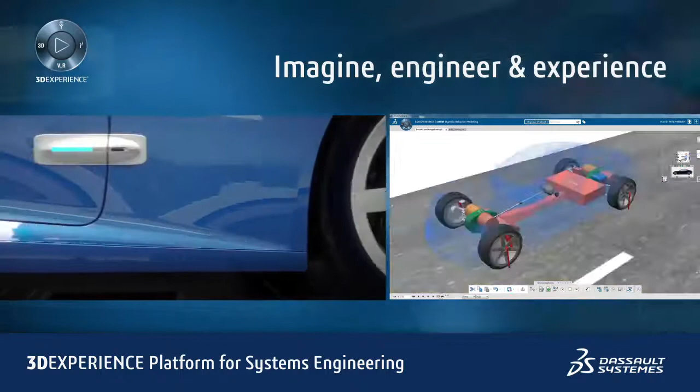The platform delivers an integrated model-based systems engineering environment to imagine, engineer, and experience high-fidelity digital replicas that accurately predict a product or system's behavior through 3D experience, just like in real life. But why do we want to put 3D experience at the heart of the systems development process? Because 80% of today's vehicle innovations come from embedded systems.

These systems account for 20 to 40% of vehicle development costs, and they are delivered as 7,000 technical and customer orderable functions that are defined by more than 300,000 requirements. The massive number of possible vehicle configurations makes it impossible to fully analyze the interaction of any one system with other systems within a real vehicle.

For more than 60% of the development time, no real prototypes exist. And even when they do exist, they are costly to produce, often incorrectly defined, and are utilized in a suboptimal way. Less than 10% of systems engineers get validation time with these prototypes, resulting in the late discovery of system errors that should have been identified at the concept design stage.

Typical automotive manufacturers and their Tier 1 suppliers use hundreds of disconnected systems engineering tools to implement these functions and systems. And in doing so, they create many thousands of models of the systems being developed, with each tool having its own view or model of the system.

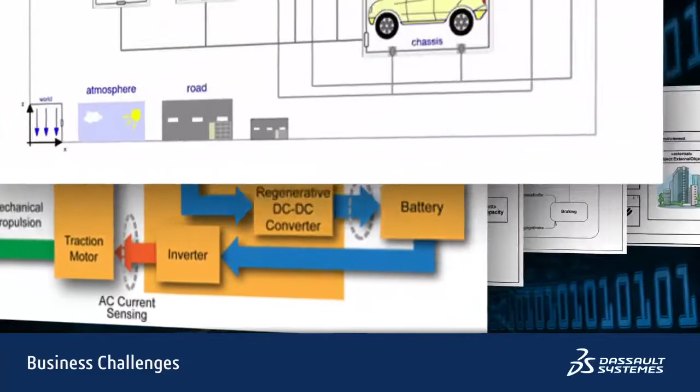But these individual models are largely disconnected from each other, as they are authored and managed by different legacy and proprietary tools. This limits cross-discipline collaboration and integration, making it difficult to build complete and consistent system views that integrate multiple engineering disciplines. It makes it extremely complex and costly to model and simulate the behavior of systems in the context of a complete vehicle, and also impossible to easily reuse system assets across multiple vehicle options and programs.

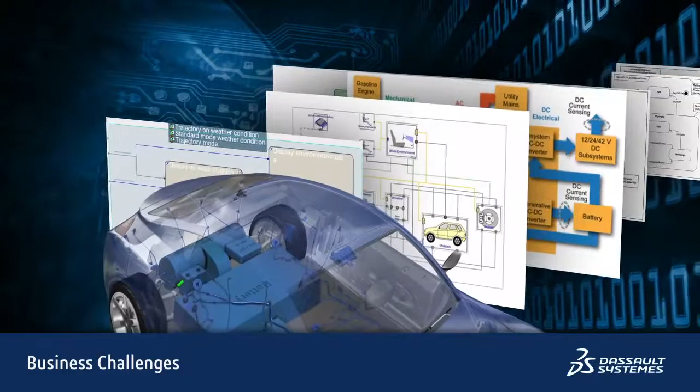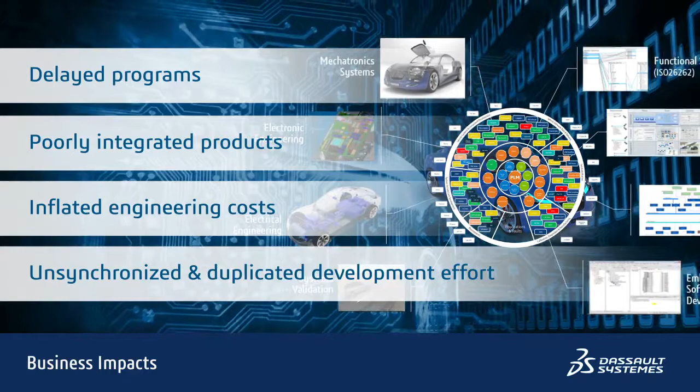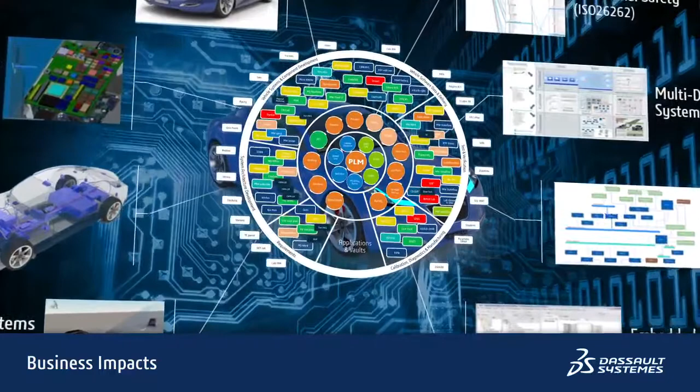The business impact of these issues is increasingly serious. Programs are delayed, products are poorly integrated with suboptimal systems, and design and engineering costs are inflated by unsynchronized and duplicated development effort. And it is getting worse. As product complexity and demands for variance increase, it becomes more difficult to master and optimize the development effort, often resulting in duplicated data that becomes difficult to manage across all programs, options, and variants.

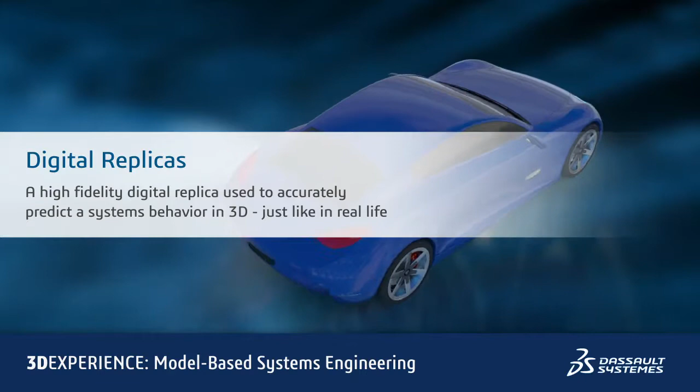What's needed to address these challenges is an integrated model-based systems engineering environment that drives the creation and management of digital replicas of existing or future systems to accurately capture or predict their behavior, just like in real life. We create these 3D experiences by using an open development environment that brings all engineering disciplines together to collaborate, define, and share a common and consistent systems definition.

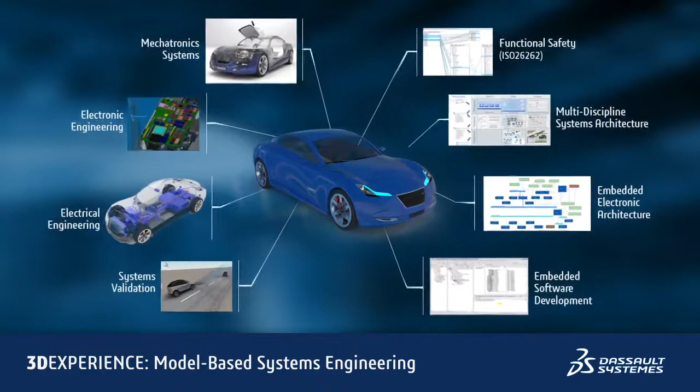A definition which we use to model and simulate the behaviors of systems in the context of the complete product and its environment, just like in real life, and reuse systems assets across multiple vehicle programs and model variants.

Dassault Systèmes addresses these challenges with a collaborative and open 3D experience platform for model-based systems engineering. This platform enables users to design and experience products and systems through a continuous engineering development process. Let's explore what we mean by 3D experience in the context of systems engineering.

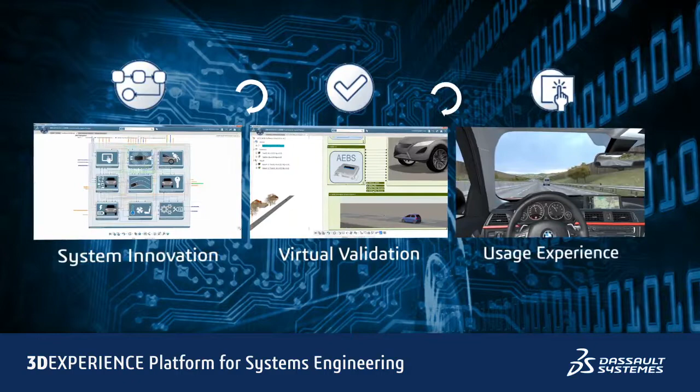We provide an end-to-end solution with digital continuity to design complex products and systems, starting from their planned usage through to design and implementation, and optimize, verify, and validate these systems through virtual simulation at the conceptual design stage, reducing the need for physical prototypes.

This 3DEXPERIENCE platform is an open environment that can be used in conjunction with your existing tools and adapted to suit your processes. It comprises a set of integrated applications that cover systems architecture and requirements, to define and compose the system by considering multiple viewpoints through a set of integrated requirements and architectural models.

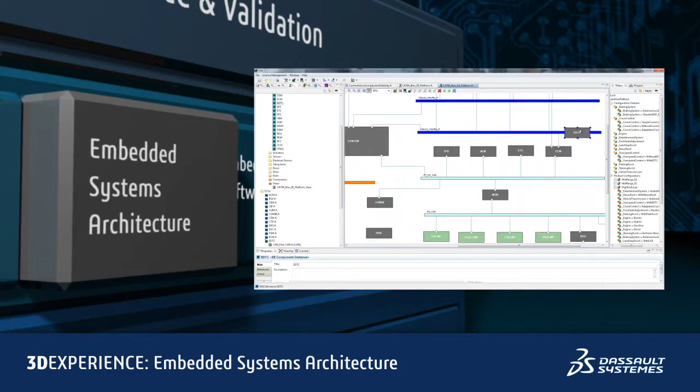Embedded systems architecture, to define, manage, and implement complete embedded architectures with electronic and electrical components and their interfaces. Embedded software, a rich tool set for developing AUTOSAR-compliant embedded systems.

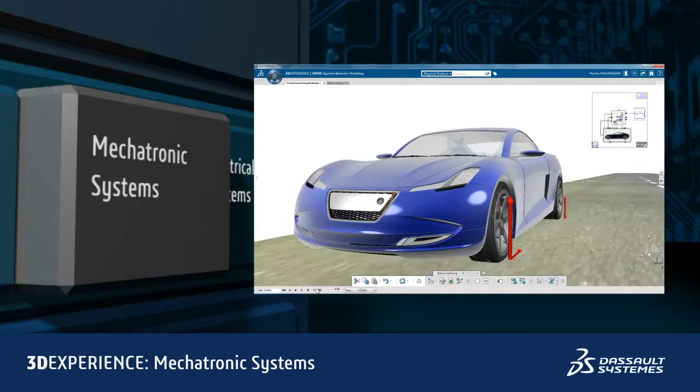Mechatronic systems behavior modeling using open standards, Modelica, and functional mockup interfaces, or FMI, where we simulate the system definition to predict and validate upfront the system behavior, just like in real life. And electrical systems, to provide the electrical interconnect between the many ECUs, sensors, and actuators within the vehicle.

We manage the creation and lifecycle of all of these systems assets through a rich collaborative framework that supports the creation, sharing, and reuse of information. The 3DEXPERIENCE platform accelerates time to value by delivering powerful cross-discipline collaboration capabilities that span all stages of the system's definition, design, simulation, and validation process.

Through powerful services for social collaboration, dashboarding, visualization, and content management, it provides a scalable solution capable of supporting systems development from the smallest to the largest and most complex engineering projects. Program and lifecycle management with configuration and change management of all assets and management of product lines, and use powerful tools to manage and document compliance with standards such as ISO 26262.

It integrates program and earned value management directly within the system's design environment, with task status collection and budget allocation and usage becoming a natural part of the design process itself. By collecting information passively throughout the design process, it provides decision makers with real-time assessments and gives increased confidence in information.

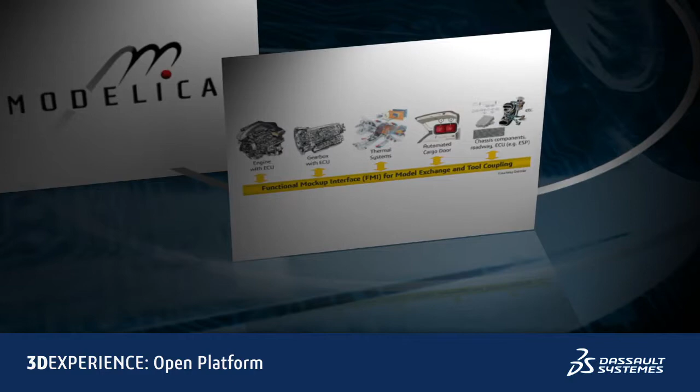Modelica, a standard, open, and object-oriented language for modeling and simulation of multi-domain physical systems. Functional Mockup Interface, a tool-independent standard to support both model exchange and co-simulation of dynamic systems models. AUTOSAR, an open and standardized automotive software architecture that enables the development and reuse of automotive software components.

And finally, OSLC, Open Services for Lifecycle Collaboration, an open community that defines a set of specifications that enable integration of PLM, ALM, and IT software. The platform is built on an open and extendable common data model and repository that provides a single source of truth to ensure that all stakeholders always work with the same system's definition, design, and simulation data.

It protects your existing investment in tools and processes through standards-based integration and sharing of information across common systems engineering tools. In addition, it enables you to quickly and easily get real business intelligence from the huge volume of distributed and fragmented systems information through powerful big data monitoring, federation, and analytic capabilities accessed through rich user-definable dashboards.

So to summarize, the Dassault Systèmes solution delivers an innovative, open, and powerful model-based systems engineering development platform. It integrates all engineering disciplines through the definition of multiple system views in a continuous engineering environment that can be adapted to your specific systems engineering methodologies. An environment that can manage and analyze large amounts of data and enable the translation of this data into innovative systems designs through collaboration with partners and suppliers.